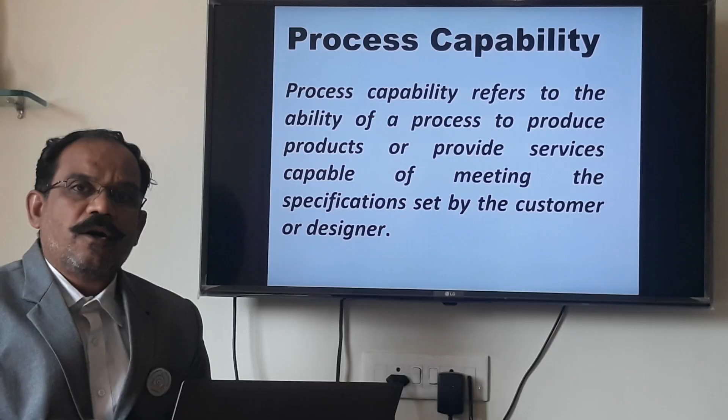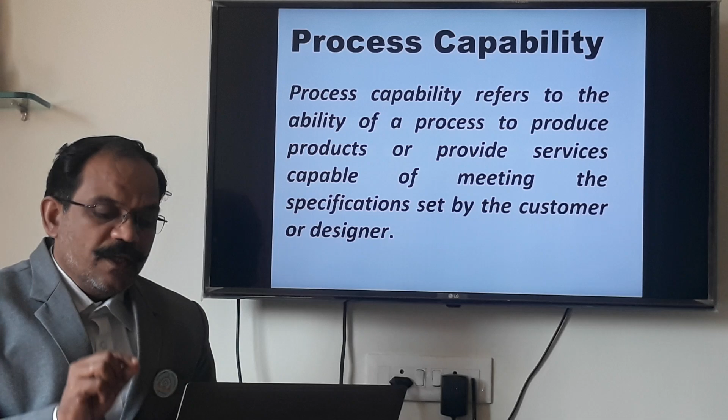Because the customer or designer will give you a specification, that specification must be met by my processes. So that is called process capability: whether my process is capable of producing such products or not. Earlier we discussed the control limits. Now, what is the difference between control limits and specification limits?

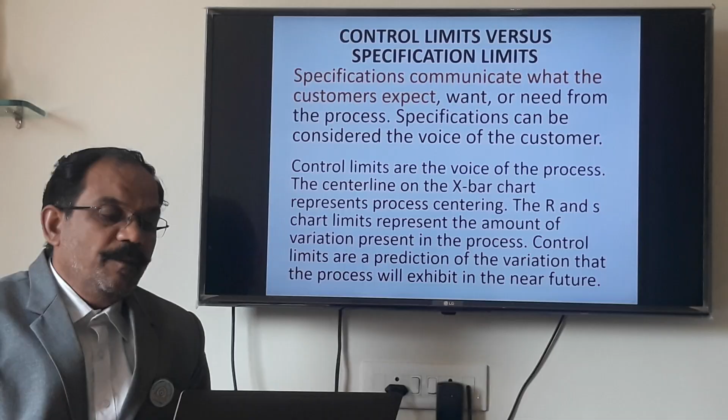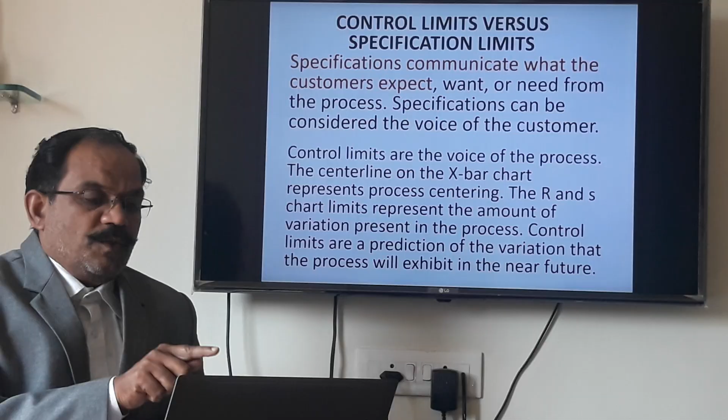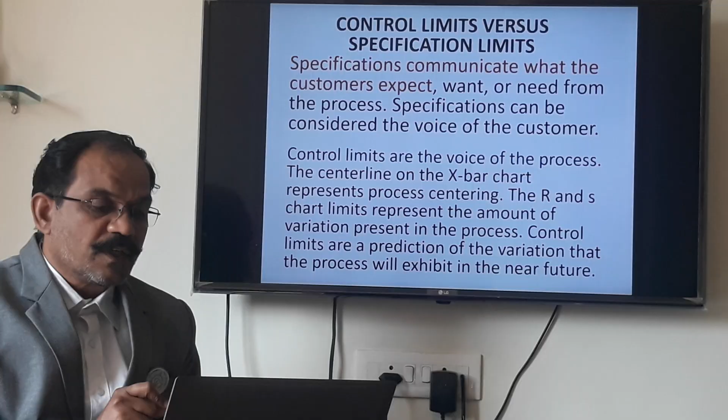Because specification is given by the designer. Control limits are also limits where the product should fall. Specifications communicate what the customers expect, want or need from the process. A designer should also know from what process we are going to manufacture our product. So specifications can be considered the voice of the customer, because after all the product is going to be sold in the market.

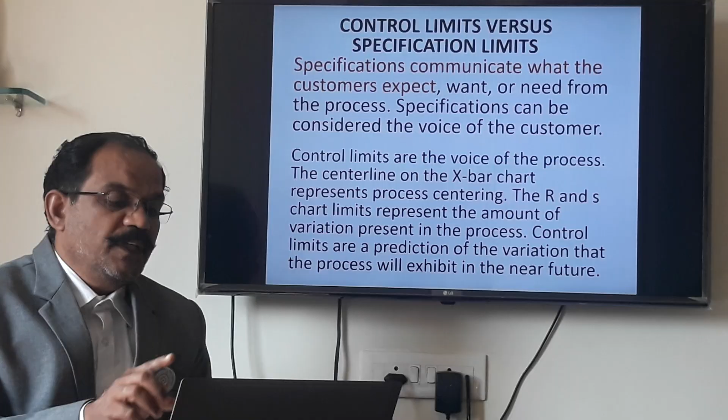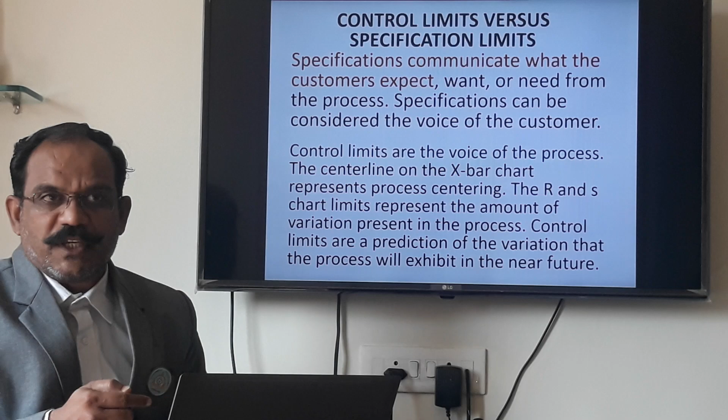Now, what are control limits, which we discussed earlier? Control limits are the voice of the process. There is a difference between specifications and control limits.

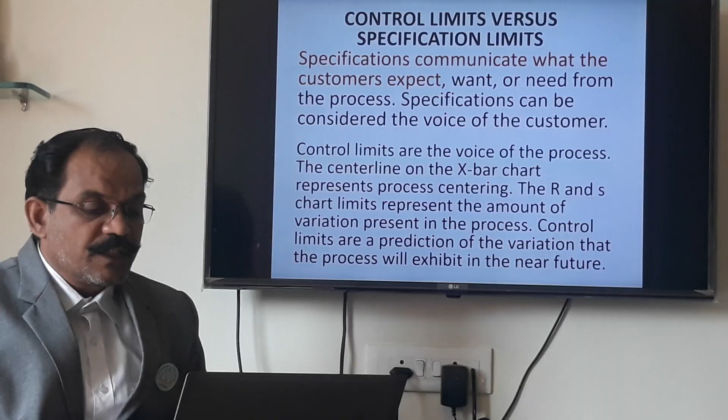The center line on the X bar chart represents process centering. The center line on any chart represents the centering of the process. The R and S chart limits represent the amount of variation present in the process, whereas control limits are predictions of the variation that the process will exhibit in the near future.

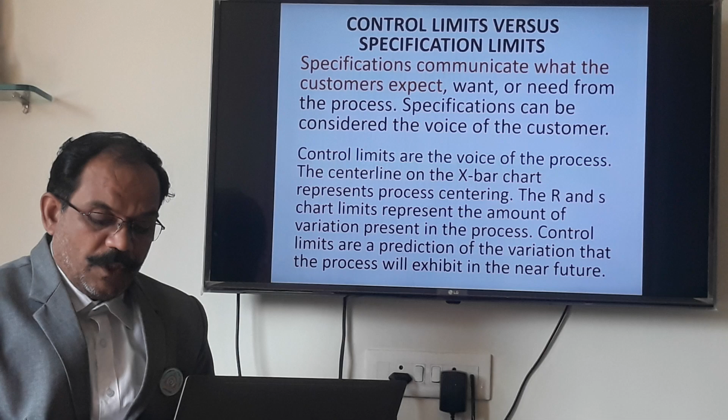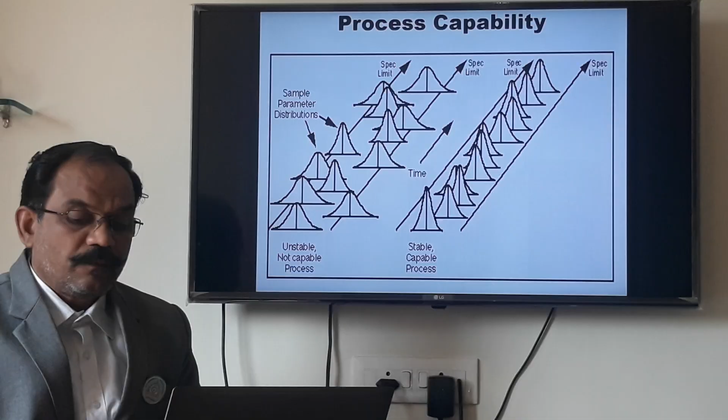So this is a capable process. The first figure shows an unstable and not capable process. The second is the capable process, because all the processes, all the indicators, are falling within the lines.